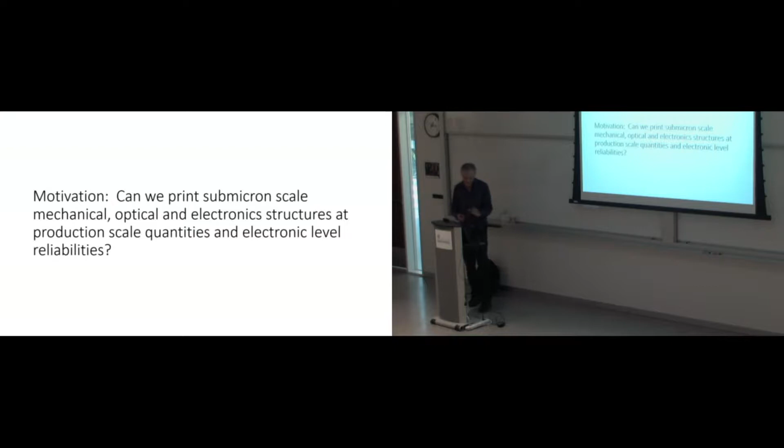So the big motivation for this is, can we really print submicron scale mechanical, optical, or electronic structures in production scale quantities, not little onesies, twosies, or little tiny wafers, but really make lots of them. And what I've learned over the years is electronic level reliabilities are often important. If you're going to make 1 million of something, it's not good enough for it to work 1 out of 100. And this is not quite to electronic levels, but it's amazingly close for how little effort we put into it.

Let's see, where's the top thing here? Oh, okay. So I'll just describe the imprint lithography. It's an older technology. I'll describe our version of it, which is self-aligned, which allows us to print over large areas and register layers. Talk a little bit about the equipment, and then some of the various results that we got. Electronics, we definitely got a lot of results. Some of the optical structures I can show a little bit, and this is more theoretical. But I just want to expand your ideas about what can be done with this technology.

And so keep in mind that one of the advantages of this is that if you can make a master, which can come from electron beam lithography or come from nature, you can take a body part of an insect or anything that you can make a casting of, you can then replicate it. And one of the big problems with electron beam lithography is it's great for tiny stuff, but you can't replicate it. So this is a process where you make the master and then replicate it. So be thinking of your favorite problem where you go, oh, it's too slow. Well, this might be a way through.

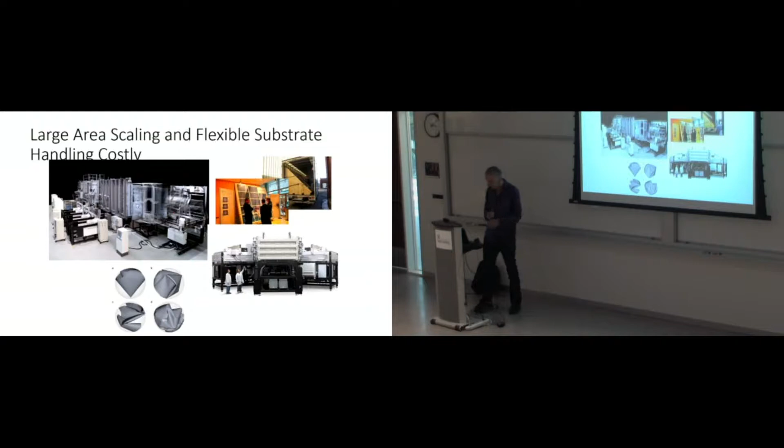Large area, if you have roll to roll, for example, you can handle flexible substrates where you don't have this kind of problem, and I'll show you that. But remember, you don't have to do roll-to-roll if you don't want to. It's just our particular implementation involved that. So with that background, now I'd like to first describe imprint lithography and what it's about, and if it's a review, let me know.

So the basic idea is that you make a master, and this master could be a silicon master. We made things on glass masters, and it has whatever structure you'd like to replicate. So it could be an electronic structure, optical structure, mechanical structure, whatever it is, you need to make that.

And I saw lots of equipment that you guys have, so you can make these kinds of things. What you then do is make a PDMS stamp. Now, PDMS, for those who don't know, is sort of like contact lens material. It's rubber, silicone stuff, and it's an amazing thing. It makes an amazing replica.

It can replicate actually little tiny 50 nanometer scallop features in a Bosch process. It's amazing fidelity. So you make a master, and then what we do is wrap it around a quartz cylinder. But you can also put it on a plate or all kinds of different things. But we wrapped it around a quartz cylinder.

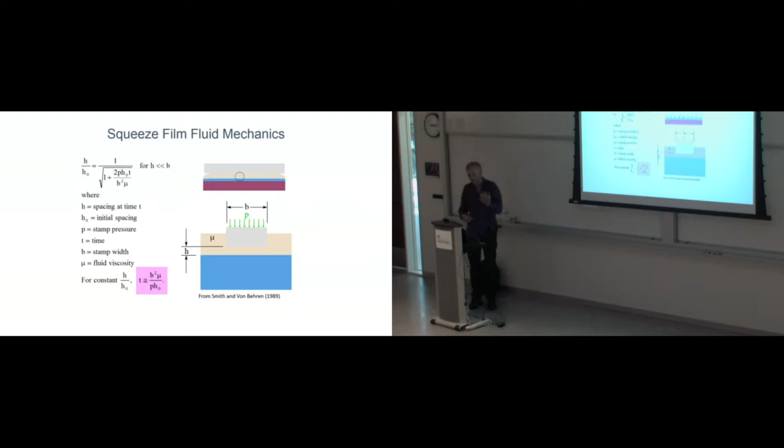And so when you see our structures, they'll look weird because they're kind of lattice-like. And the reason is that our average flow level is the same, so you don't have to squeeze fluid for long distances. If you try to squeeze too much fluid too long, you'll get a burp of a big chunk of fluid. But anyway, those things are all pretty well understood, what the time scale is and everything. Okay, so that's the basic.

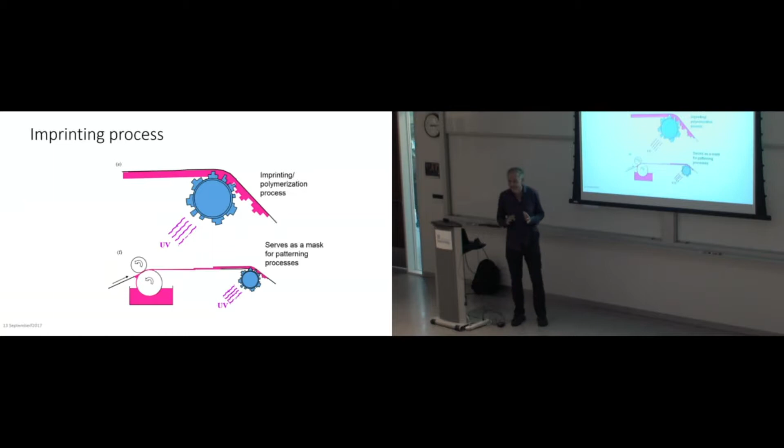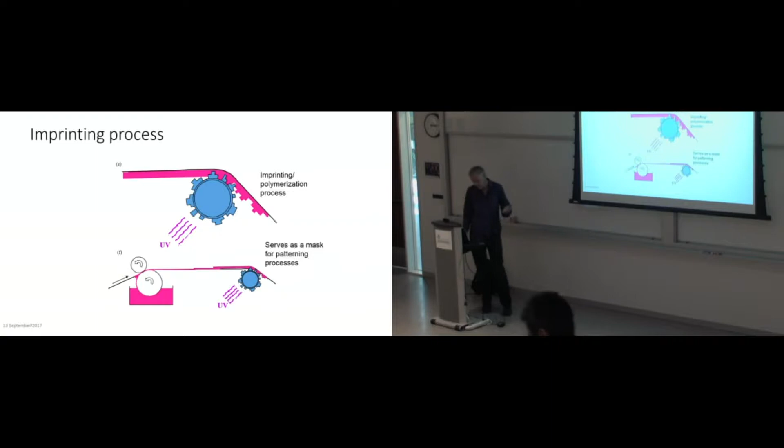So ironically, it's easier to make 2-micron features than 1 millimeter features with this. A 1 millimeter feature, you'd have to squeeze it. And we're talking about very precise height controls. In our particular thing, we have to control the heights to 1/10 of a micron or more. And so that's why it's more important for us. For other applications, it might not be important.

Okay, so now that we've got the basic imprint process, how do we incorporate it into a process where we make, in this case, electronic devices, but it can also be mechanical? So it's kind of unique, and it greatly lowers the cost of manufacturing things. So conventionally, if I want to make an electronic or MEMS device, and suppose I have 4 layers, what you typically do is deposit the layer, spin resist on it, align it, develop it, etch, strip, clean, then you do the next layer, and you go around this cycle 4 times, and then you're done.

What we do in this particular thing is we have the imprint step that I described earlier, but what we do now is we deposit all of the layers, and then we have one imprint step. And the various mask layers, suppose we had 4 mask layers here, the information is encoded in 4 different levels of the imprint polymer.

So normally photolithography is a 0-1 operation. If there's no photoresist, you etch. If there is photoresist, you don't etch. Well, this we actually can have different levels, and using those levels, we can have all the layer information imprinted in one step, and then we do the etching all in one step. And this has a bunch of advantages.

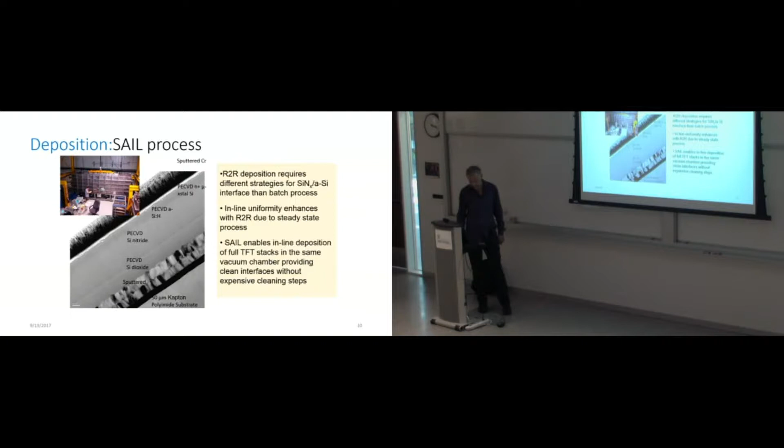Again, this is the imprint process, just to show you what kinds of things we could do. This was just with our flexible things. We could do 40 nanometer lines on 50 micron polyimide. Now, people can do with rigid things down to 10 nanometers or less. And you guys are probably familiar with some of those.

And you can make very complex structures with multiple heights. And we could do this at roughly as fast as 5 meters per minute, which is quite a lot, especially if it's 13 inches wide, it's quite a lot of devices.

And one of the important points here is that the speed of a device depends on mobility: the higher the mobility, the shorter the delay, so it's a faster device. But it's even more dependent on the channel length. So if you can reduce the channel length, you can increase the speed much more than diddling around with exotic materials. So being able to make small transistors is really important for speed,

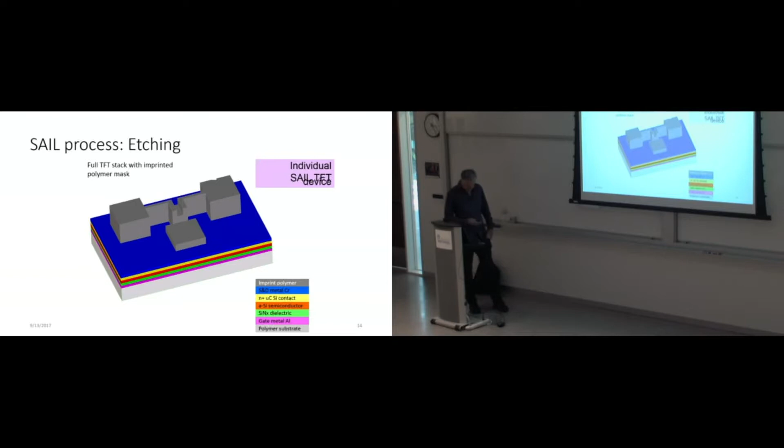So what happens is we now etch down, and we etch away all but the lowest level, which in this case is the gate metal. We then etch away that metal and pattern it. Okay, then we undercut. So we've now undercut right through here. So now these pads are isolated. The gate pad, the source, and drain pads are isolated from each other.

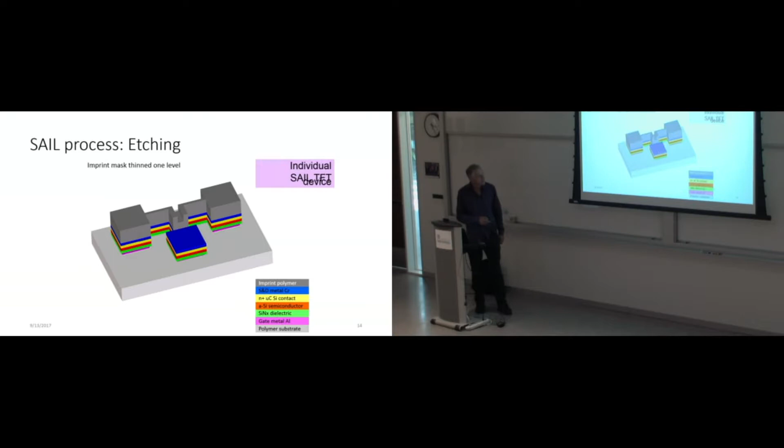We now lower the level. We're using the level information now. So we've now uncovered this, so we can now work on this. But the rest of it is still more or less covered. I mean, you will have some little undercuts. And that kind of limits, for our imprint lithography, what kind of spatial resolutions. It depends on how controlled your undercut is.

But anyway, now that the gate pad is exposed, you can etch that. Now we do another lowering, and so we've now exposed the channel region. So we can now etch away, not the gate insulator, but the N plus. And now we still have the source drain here protected by that. And then we remove that, and we now have a completed transistor.

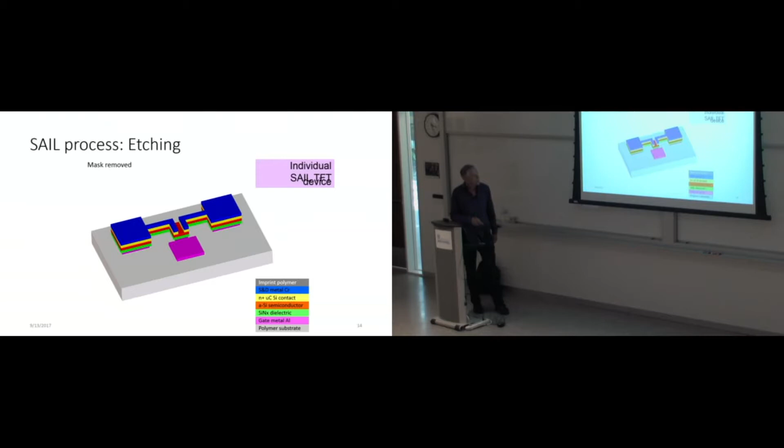And we can also do more complicated things. It's not just enough to make a transistor, you want to make arrays of things. So this is the same process for arrays, where we now have a pixel capacitor. Here's our transistors. We also have crossovers and other things.

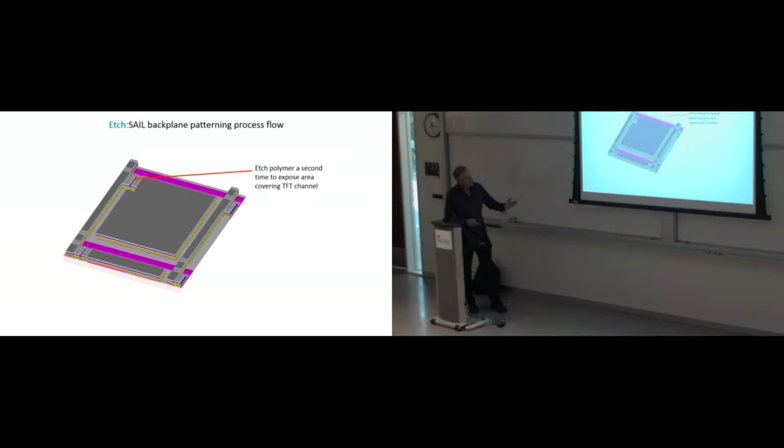Now, the reason for these kind of grill-like structures is that we have to undercut in order to remove a layer. So these have to be thin enough so we have controlled undercut. So you'll see that this is sort of the same kind of thing. We do that, we do this, we expose this, and we go through the various things, and we now have a completed

backplane. So this can now be part of a MEMS device, or we can control a liquid crystal display. I'll show you we've incorporated electrophoretic and OLED kinds of things. And it's basically an active matrix addressed array of metal plates that we can change the voltage on, and you can use it for whatever you want.

How much control of the undercut do you need for this? Not very much, because you just need to make sure that it undercuts here, but doesn't undercut here. And so your tolerance is what, like 10%? Yeah, you want to make sure that this gets completed, but this doesn't go. So you can make whatever ratio you want. If this is 100 to 1 or... Just design around that. Yeah, you can design it however you want, subject to other constraints.

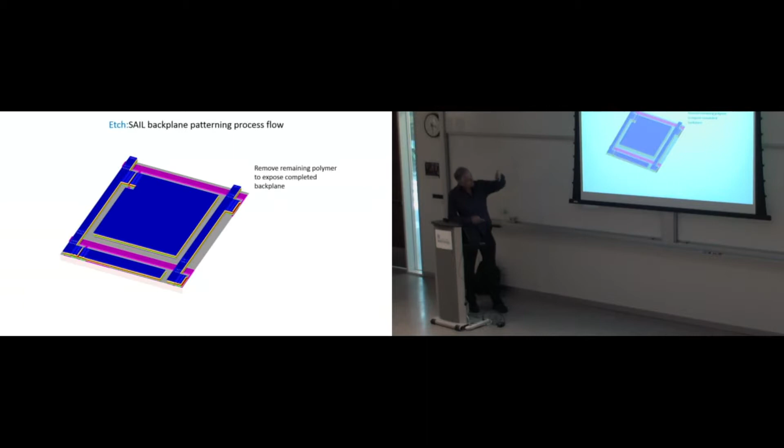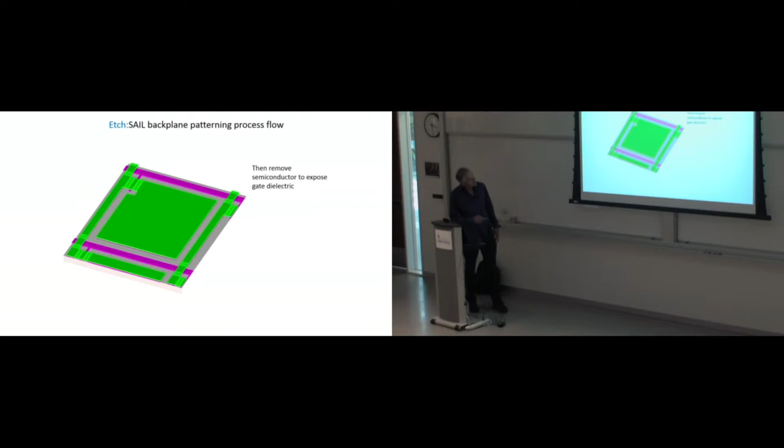And again, this is only if you want to use imprint lithography for flexible stuff and you want very high complexity circuits. And then this just shows you what the different layers are as patterns. I'm stripping away each one so you see how there's a gap here in this one, and there's a continuous metal, and there's the bottom gate metal.

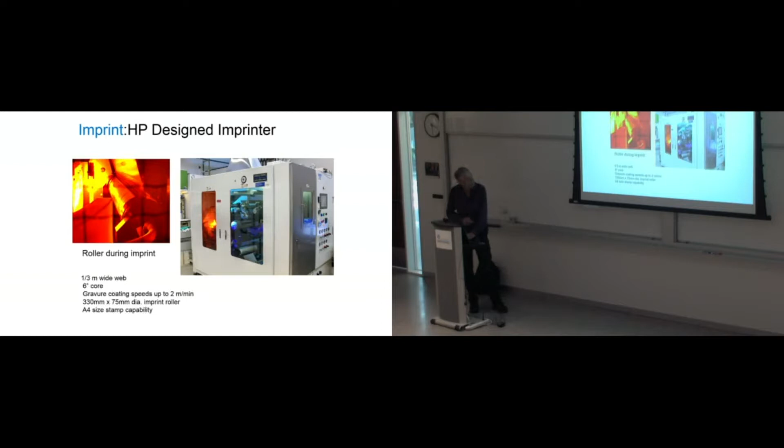So what does the actual equipment look like? Here is the imprinter. We designed it. We worked a little with Conseco, a Japanese company that dealt with, I think, tapes, but we just gave the designs. We first had a 4-inch one, and then we have a 13-inch one. This is the house-built 4-inch one. You can see it's got some rollers and the UV in here, and then a take-up roller.

Or you can do a roller kind of thing. Some people can put it on a roller and then just roll it out and do the imprint lithography there. And again, if you can do your alignment, then you can just treat it like a photoresist mask and do what you normally do. But it can be at nanometer type scales if you want. And you can do very precise height controls on things.

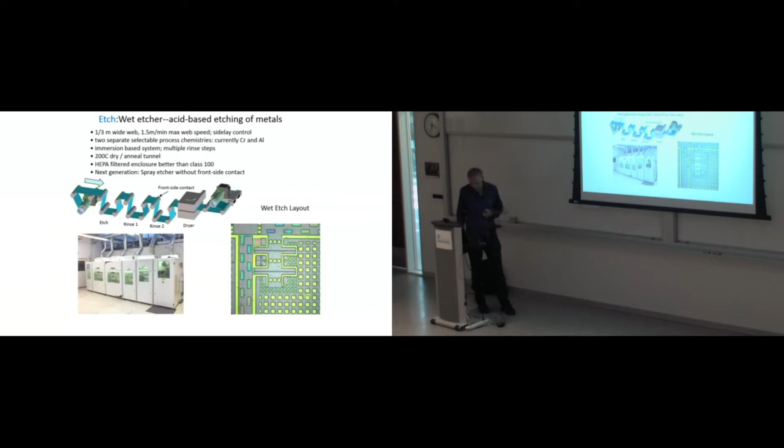We actually had multiple stations. This was partly designed by us, but mostly by this company that does this kind of thing. But again, you don't need any of this just for what you want. And then we had dry etching. This kind of addresses your issue about etch selectivity. So we have both wet and dry etching. For metals, we use the wet etching, and for dry etching, we did the...

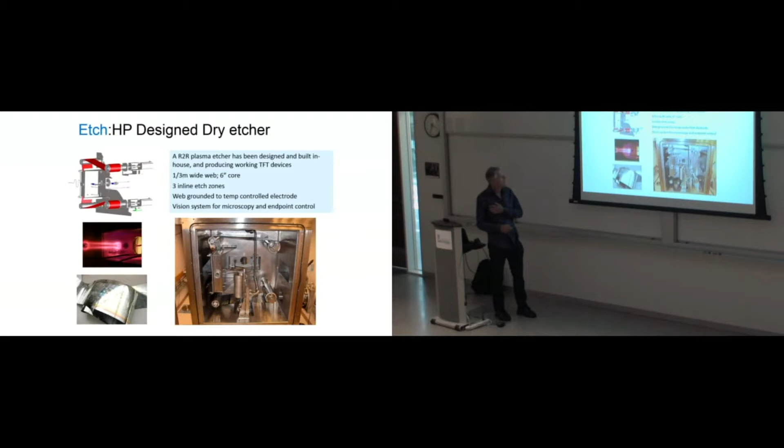So there's a roll-to-roll here, and this we made, and it's big enough to crawl into actually, and that's the plasma in the thing. But it kind of shows you how it works. Here's some of the structures that we made. And you notice this characteristic waffle. That's because we want the average height to be constant, so you're not squeezing fluid around. And these are different transistors. You can see that's 2 microns right there, so you can see how accurate structures we can do.

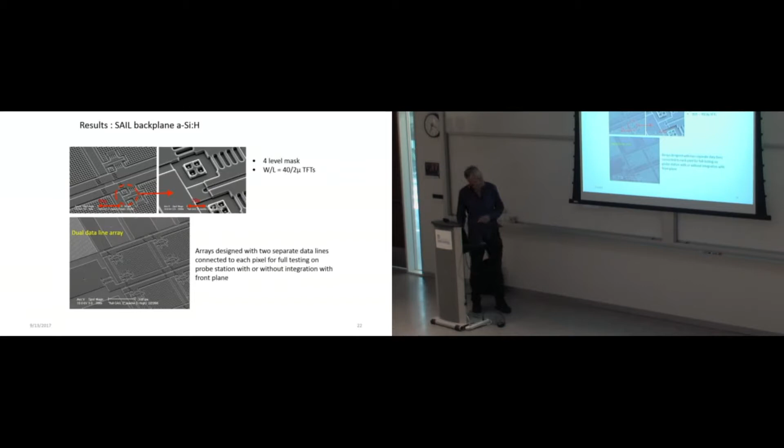Remember, because you're dividing by W over L, which is 20, we're actually getting 20 microamps out, which is pretty good for amorphous. And it's partly because you got a small device. And remember, we're doing it over 13 inches. And you can get decent mobilities of almost 1 and very low off currents in general. Now, we've also done it with zinc tin oxide, so metal oxides. It does require working out the chemistry a little bit. This one we had ITO contacts and zinc tin oxide.

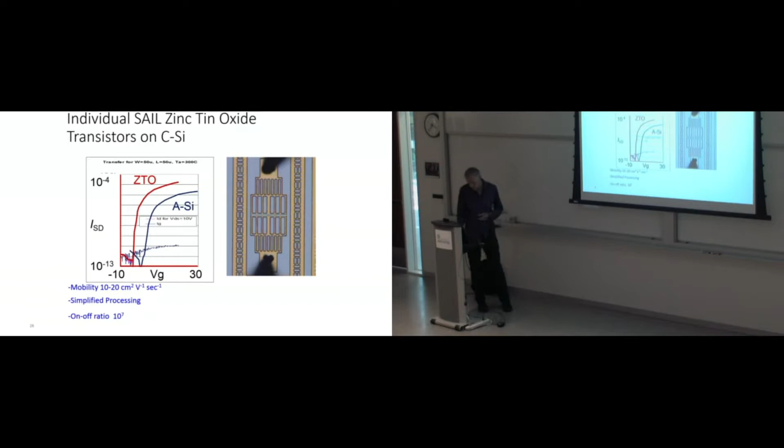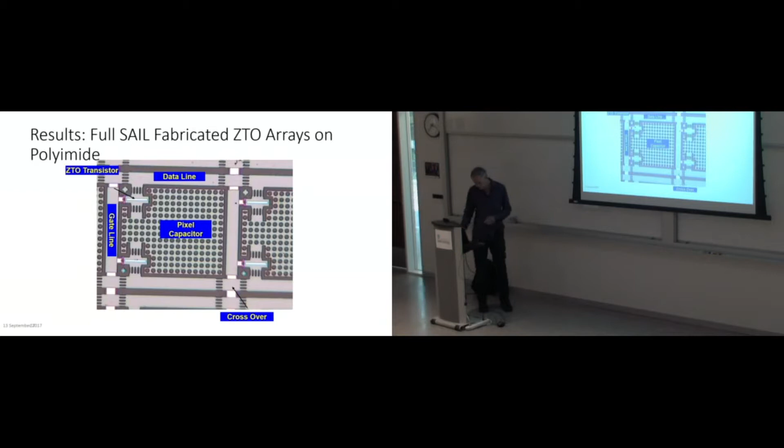This is a device, you notice this characteristic weird structure, but this was not so much for flow isolation, but also for flow leveling. So we can get mobilities of 10 to 20 on the zinc tin oxide, and IGZO, I think we get even better. But here's the full zinc tin oxide: the capacitor, the transistor, the gate line, and crossovers. So we can do some pretty high performance things.

As you know, with everything, there's instabilities. The metal oxide transistors are remarkably stable for most circumstances, except a negative bias with light, and you get this instability that kind of comes back. But people understand that, and so they have been able to deal with that. That's why metal oxide transistors can be used for drive electronics, although I guess people are going to laser annealed poly as the preferred thing.

But you can make things that are fast enough for at least driving the gate drivers and bigger displays. With bigger displays, the pixel time starts becoming faster than amorphous. So if you have a 4K display that's 80 inches, the time scale for switching that, there's too much capacitance, so you start needing metal oxide for the active matrix.

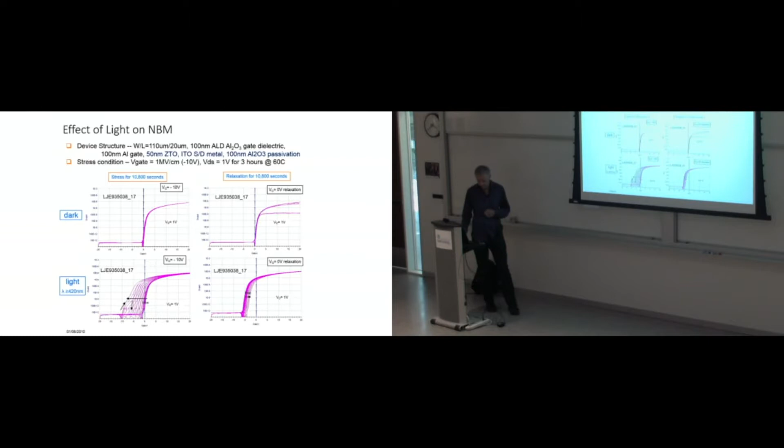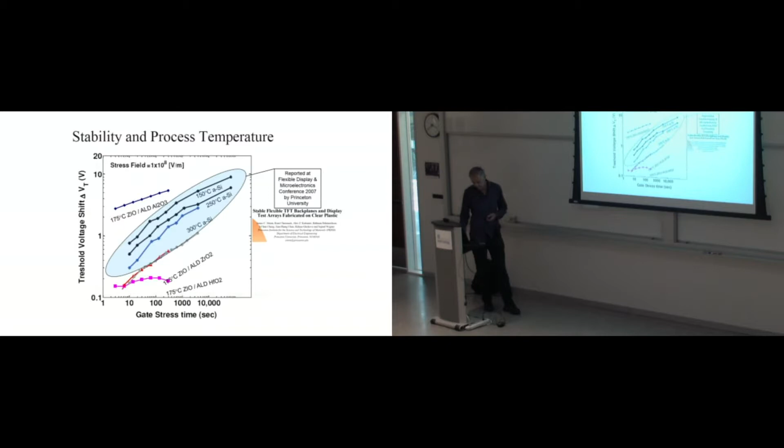Since I know some people are talking about having to deal with metastability, this is how the threshold voltage shifts for amorphous silicon, and this is for the ZIO and some of the others. It's less, and it requires light. So if you keep light off of it...

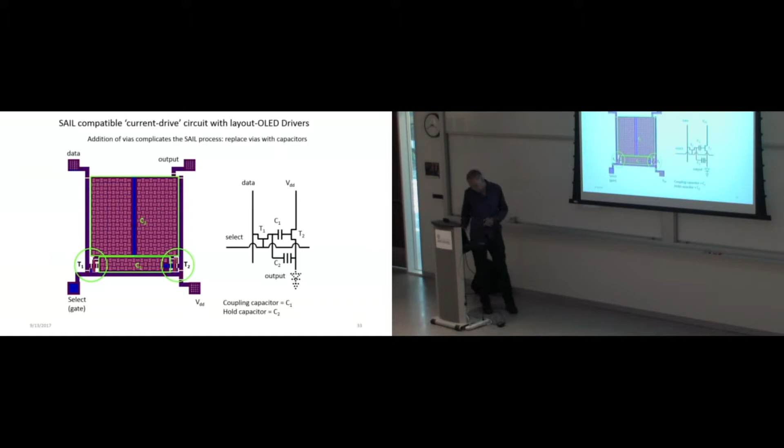Then we also did OLED displays, so that requires a 2-transistor circuit. So this is what the mask layout is. This is the functional layout. The only thing that's a little interesting is how to get a signal from the bottom layer to the top layer. We use this capacitance structure, so it won't pass DC, but it will pass an AC signal, and that's good enough to switch. This is the OLED kind of display, and then we put color filters on it.

Yeah. Did you do this with emissive? Yeah, if you can jet the emissive material, yeah. No, I'm talking about using the same process to etch. It's hard to etch organics because your mask is organic and your OLED is organic, so that's a little tricky there.

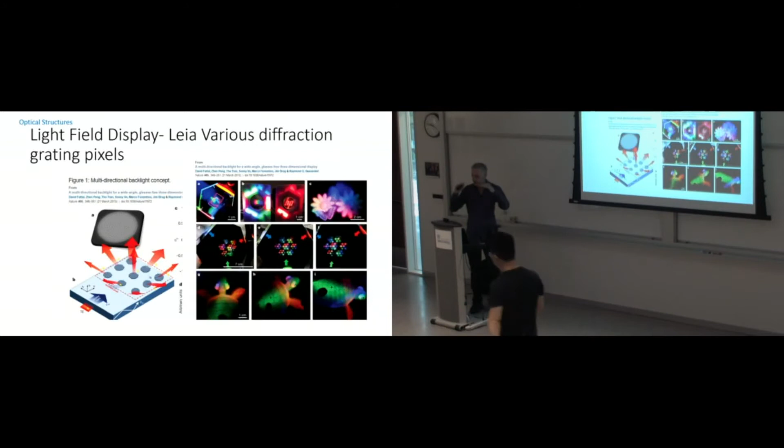Okay, yeah. Following up on that one, do you see any rounding of the features as you do this lowering of the levels, or do you actually manage to do it razor sharp? Well, there's a little bit. It's not completely anisotropic, so there is a little shrinkage down. That's sort of in the 0.1, 0.2 microns.

So for our particular thing, I wouldn't claim that we do better than about 0.1, 0.2 microns, partly the undercut parts of things. If you don't do the self-aligned part, but do the other things, you can do much better than that. So you can do 10 nanometer kinds of features if you don't do the self-aligned part.

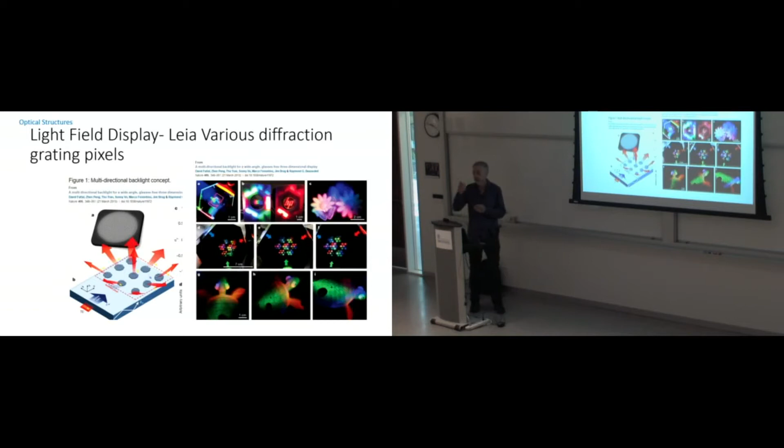and right in the middle you could put a particle that had the thing you wanted to do surface enhanced Raman, and we got enhancement factors of 10 to the 9th. Controllable, because you get very high field enhancement. And so a whole business went off, like we made these structures where they'd get the 4 fingers to come together and you could put molecules in there.

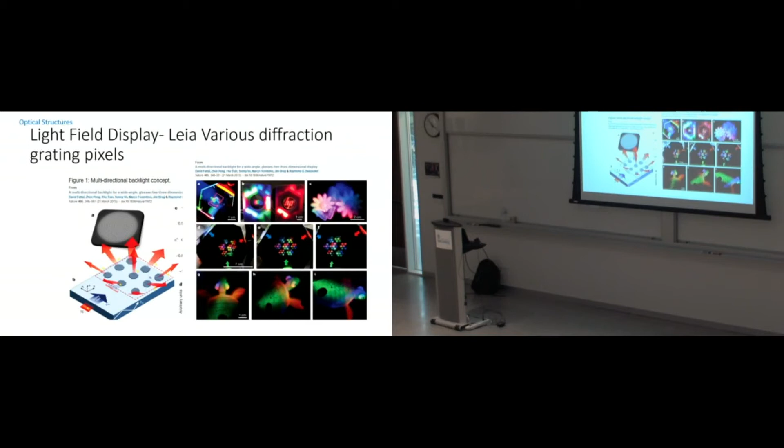Now, another thing that I filed some patents on is gecko self-cleaning. So again, I'm just trying to get you guys interested in thinking beyond the box, or beyond the hoof or foot. So geckos, as you know, can climb on glass. They can climb upside down.

And for the longest time, they wondered how they do it. Do they suck? Do they have a vacuum? They put geckos, or at least feet of geckos, in vacuum, and it still worked. And they finally figured out that it is van der Waals force. So there's enough force. It's not a super strong force, but the amazing thing about the gecko is not that it can stick upside down.

3M has all kinds of adhesives that I could hang even my weight upside down, but I couldn't remove it. And if I started walking up a wall, it would get so impregnated with dirt that halfway up I'd fall off. The amazing thing about gecko stuff is it's a self-cleaning dry adhesive. So how does it work? Basically what it's got is this hierarchy of little surfaces that allows you to get huge contact areas regardless of what the surface topology is.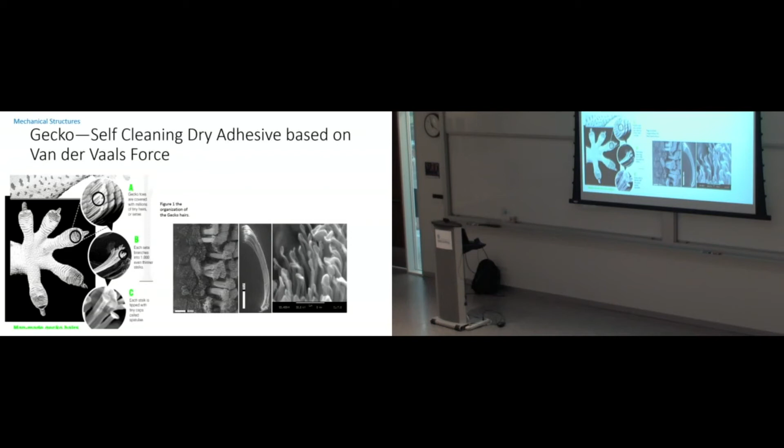And so what does that have to do with imprint lithography? Well, we can make things like this because some of the scales are similar. So this is one concept where you start with a substrate that has a bunch of fibers. You make this in a giant block. You put a whole bunch of fibers together and then slice it so you have some fibers. And then you do imprint lithography, or you can do polystyrene spheres and various things to get the different levels of structure. So you have some compliant large-scale structures and you have smaller compliant things on top of that.

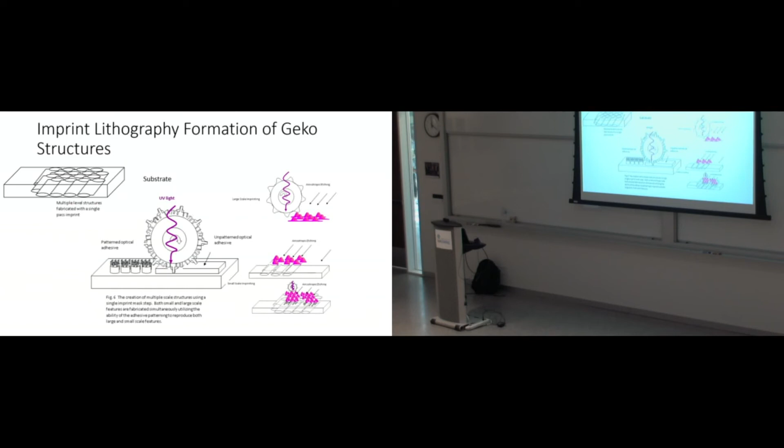And so you can make kind of this hierarchical compliant structures, for example. And because you can do this in roll-to-roll or very big things and flexible, it can accommodate the macroscopic disparities, and you get this kind of structures. And anyway, that's the kind of thing that you could think of. So I'm just trying to get you guys excited about what things can be done. Anyway, I hope I've got you interested in imprint lithography. And again, you can combine it with your existing stuff.

Like if you have photolithography, maybe you need a step where you need electron beam lithography, and it's too expensive or serial. You can have the mask done and make a casting and then do processing. You can combine it with inkjet. You can combine it with other things. And you can really make thousands of devices consisting of thousands of transistors, and they work. And they're high performance because they're micron size things, not, we do a lot of inkjet printing of stuff, and you have 20 micron channels or really big sloppy things. And for some applications that's fine, but this is pretty good. So I think there's a lot of applications, and thanks for your attention. That's all.

Any questions? Yes. So how good is your nano-imprinted gecko thing? Well, we haven't gotten super far on that. Some people have gotten where they claim they can. Now they didn't use imprint, but there are some people with electron beam stuff who have gotten stuff that if they scaled it up to that big would be able to hold you for a little while. So you can get around, I think it's something like 90 newtons per centimeter squared, or there's some number like that I'm forgetting now. That's roughly the amount of force you can get ideally, and then of course geckos tend to be a factor of 3 or 4 below that. But yeah, so the idea is eventually you could climb up El Capitan.